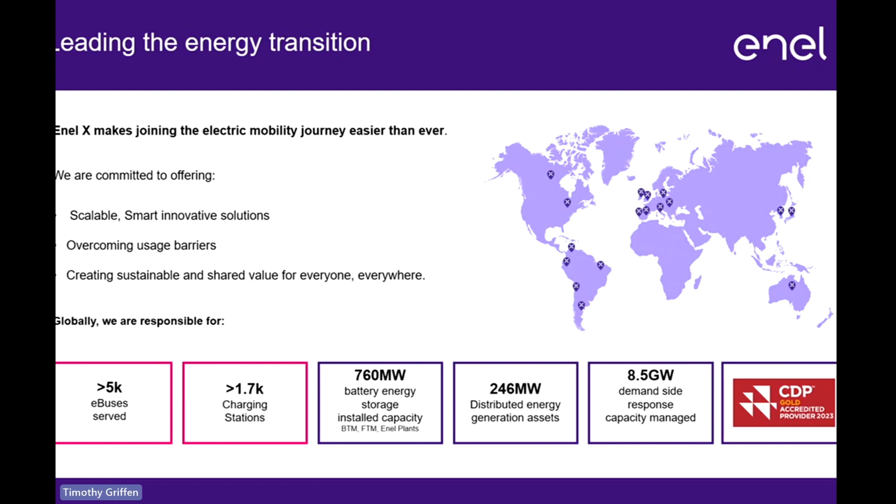As you can see from the slide there, the numbers speak for themselves. We serve over 5,000 e-buses internationally, pushing on to 2,000 chargers installed, and also on the battery energy storage, distributed energy, and the demand response capacity that we manage, almost 8.5 gigawatts.

So this is what I would say is a very dynamic energy landscape. And part of that is obviously the trilemma. We're at a transition point for the industry, industrial revolution of energy 4.0, I believe. And collectively, we're all moving towards a more sustainable, more environmentally friendly way of working. Every business is different in that they have a different mix of whether they need secure, affordable or green energy.

Tim alluded to before that the public transport sector's journey to net zero is moving quite quickly. TfL want to be carbon neutral by 2030. We want to have a zero emission fleet by 2034. That's approximately another 8,000 vehicles between now and then. First Bus, Stagecoach, similarly zero emissions fleets by 2035. Most of the large operators are on a similar kind of pathway to doing that.

Previously, I think the only real issue with energy was the sustainability side of things. Obviously, with recent events, energy price volatility driven by Ukraine and grid instability now means that it's a very volatile area that we're in at the minute. It's obvious that you need a partner that can get you secure energy for your business continuity, obviously a sustainable solution as well. And it's got to be affordable for you to make that business case for your own personal businesses.

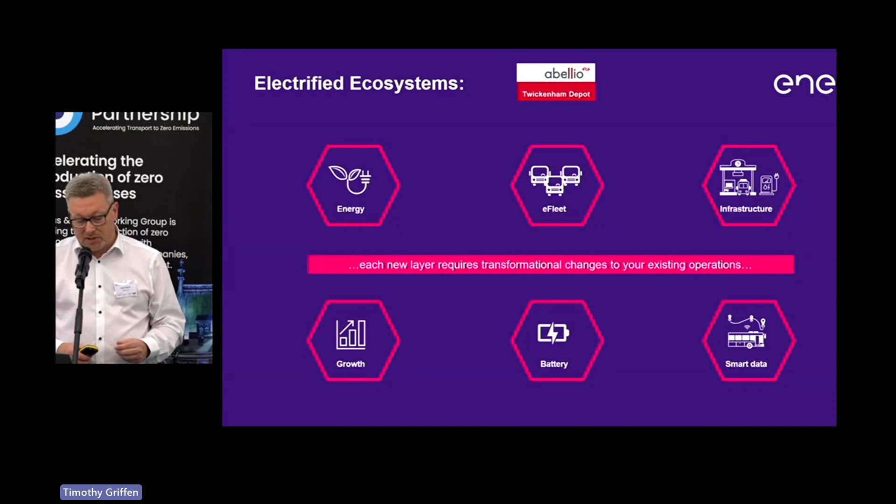Each depot is different. As you can see there, we put on the screen six key areas that you need to consider. You've got your energy, your fleet, your infrastructure, you've got future proofing for your growth, your battery, and your smart data, getting extra data points that bring you efficiencies from your assets and your operations.

But with all these key separate areas, it brings with them all areas of different complexities. We just highlighted some of these on the screen, and I'm not going to go through all of these, but it's just highlighting some of the areas you need to consider when you're electrifying your depots.

If we look at energy as the first one, as battery electric vehicles overtake your internal combustion engines, the cost you're spending on fuel against energy will counterbalance, and so you might want to look at green power purchase agreements.

The challenge of getting a grid connection is absolutely huge and critical for most businesses. Are there other developments in the area? What are your neighbours doing that could affect the grid connection? Getting energy market access to monetize your assets, and utility bill management is another area you might want to consider, where you can collectively look at all your sites and actually make adjustments to the way you're using energy. The greenest kilowatt of energy is the one that you don't use, essentially.

So that's one of the key areas of the complexity. There's a huge amount of detail within each of those. Within the presentations that Craig and Peter are going to give, consciously or not, they're all going to talk about different areas of this kind of ecosystem.

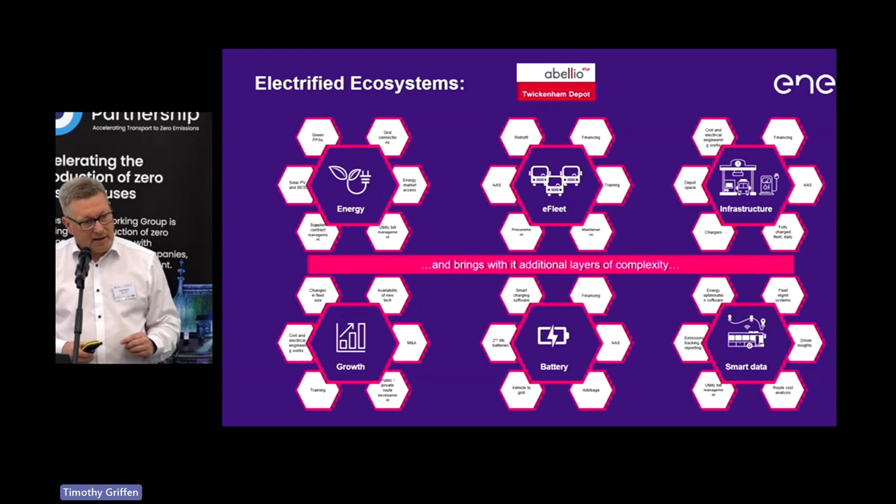None of us can work in silo or independently. It needs everybody to collectively come together to provide a solution, and you need an interconnected ecosystem there. So it's designed around your specific needs, and each specific element needs to come together, and you need somebody that can pull all this together for you.

That's the crucial role that Enel X plays in this electrified ecosystem, bringing all the partners together to make sure the client's got the solution that's fit for their needs. So I'd like to introduce Peter to talk about the role of the IDNO and his background, and also a bit of insight into why we're here today, which is the Twickenham depot.

Good afternoon, everybody. They said warm the crowd up, so I've come to do that. Let me first see if I can operate this.

So what we're talking about today is all these systems effectively need a grid connection. They won't work without that grid connection. The network is rather constrained to get that connection. So what does ESP do as far as that's concerned?

ESP are an IDNO, and for those who don't know what an IDNO is, it's an independent distribution network operator. The difference between us and DNOs such as UKPN, who's in this area, is that we can own and operate networks throughout the UK, and we do that with the same regulation as the DNO. We're licensed by Ofgem, and we have the same regulatory compliance criteria to meet as UKPN do. So we do the bit in between, effectively the DNO and the end user — that's the bit of our network.

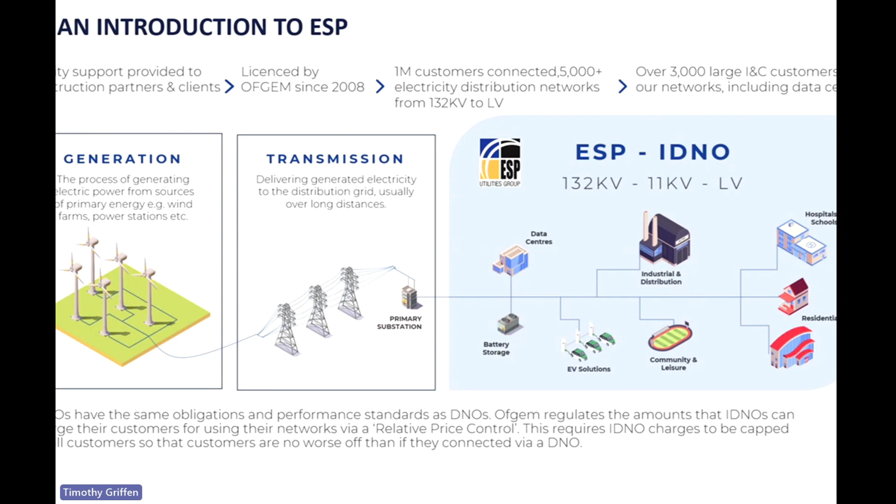Moving on to challenges and capabilities. In terms of the challenges, there are a number of challenges to get a connection from the grid, based on the capacity available at the grid. We apply for what's called a point of connection to the grid, and that in itself has its own challenges, because although you might ask for a typical bus depot site of 4 or 5 MVA, the load might not have that capability in it. So it may need reinforcement activity on the DNO's network, and that could take substantial time.

Equally, there are other users that want that network capability who are also in the vicinity of most of the bus operators trying to capture that network capability. So there is a challenge in getting a point of connection to the DNO. At the end of the day, the management of that point of connection is really important to the end user. Why? Because if you don't accept that point of connection and you don't pay for it, it's likely to go to others, and the network is really constrained out there. So we've got real issues in terms of the point of connection activity.

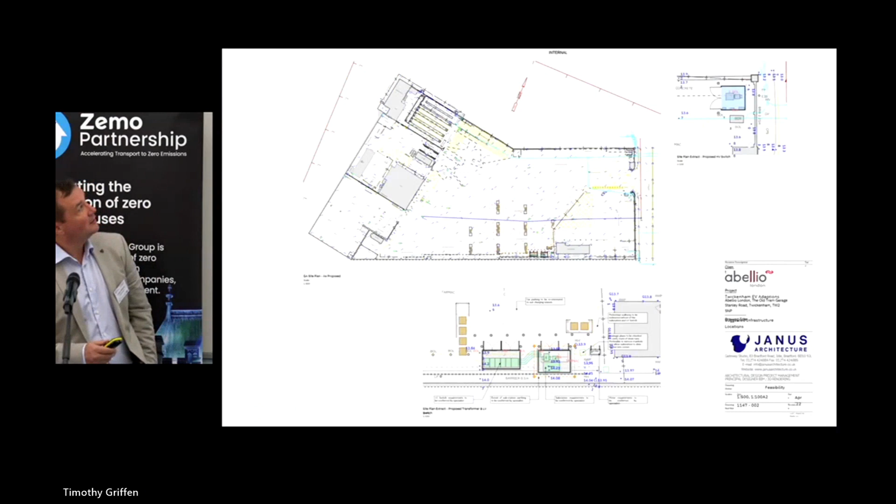So over the next few weeks and months, we had a lot of ideas banded around about locations and things. Loads of drawings came out, lots of meetings about how to site stuff. These aren't my drawings, they're Janus Architecture's. A lot of work went into these, figuring out how to do 100% of the site.

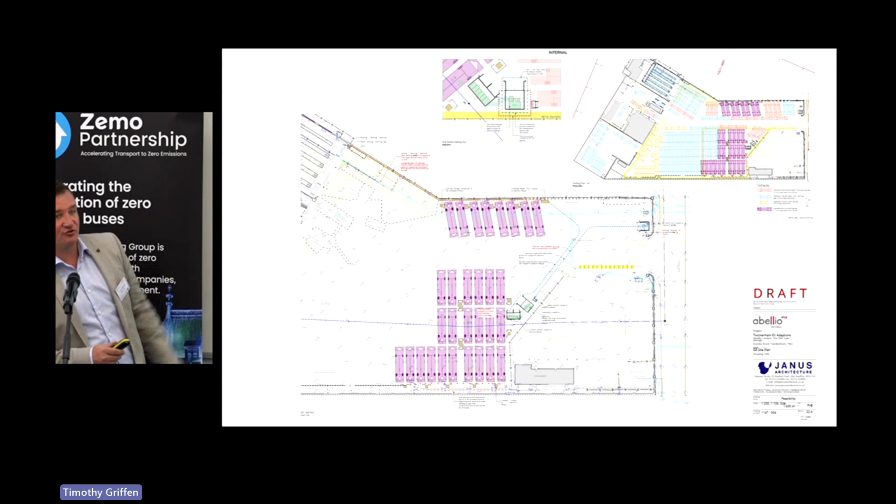And the final layout was this one - you'll see the site when you get there, but this is showing phase 1. I think it's 30 buses, 16 chargers, with one spare. It's got the substation and the LV panel board, which you'll see when you go to site later this afternoon. But we have to take into account phases 2, 3, 4, however many, if they ever happen - which they will do.

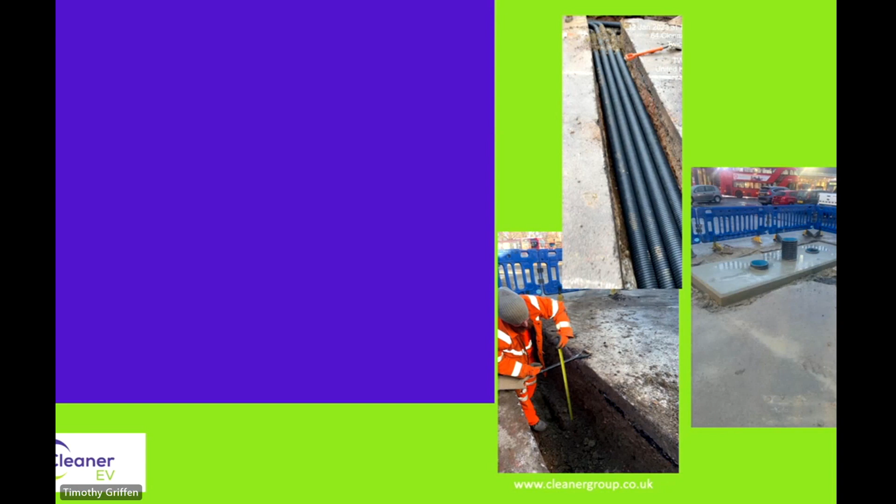Now we have the locations of the buses, the chargers, the switchgear, the substation, we need to work back from each charger. How much power each charger needs affects the size of cables, and for each charger there's the civils, the GRP, and the switchgear.

As I stated before, we really want to deliver the best project for our client with the budget we've agreed on. So it's really important that the client gets - I won't say free, but at no extra cost to himself - as much value for the money as possible. So on this project, it's not free, but it's working within the budgets we've got.

We upgraded the main panel board, which you'll see, from 2,500 amp to 3,200 amp. It was quite obvious to me that what was specified wasn't big enough for future use, so we upgraded it.

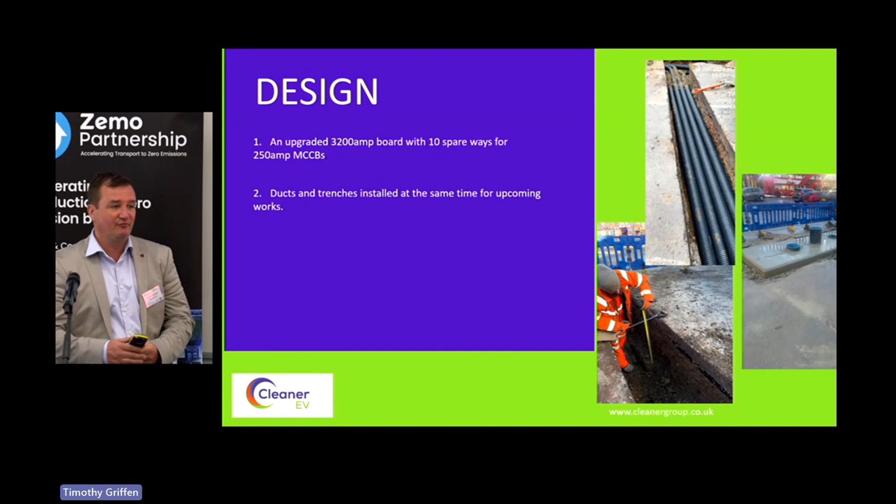Ducts and trenches were installed at the same time for upcoming works. We've actually ripped this car park up, and we've got big plant on site. It's easier for us to dig a wider trench and put more ducts in now for future use of chargers than it is to come back and do it after. So we just did it - no problem at all.

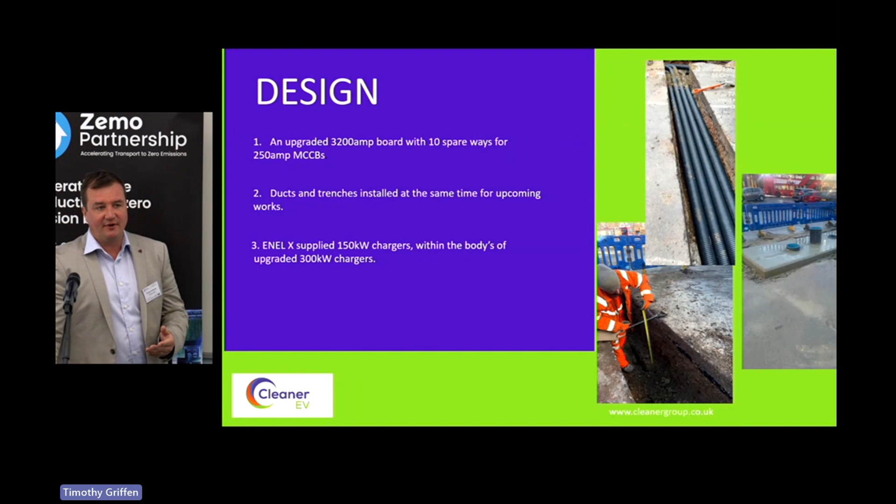ENEL X supplied 150 kilowatt chargers, which was what we needed, but they supplied them in the body of a 300 kilowatt charger. With this, the client in years to come can add rectifiers to the chargers - we'll open one up for you today. They're actually only half full, and they can have probably 200 kilowatts of charging from these chargers, with no real major costs or upgrades if they ever need it.

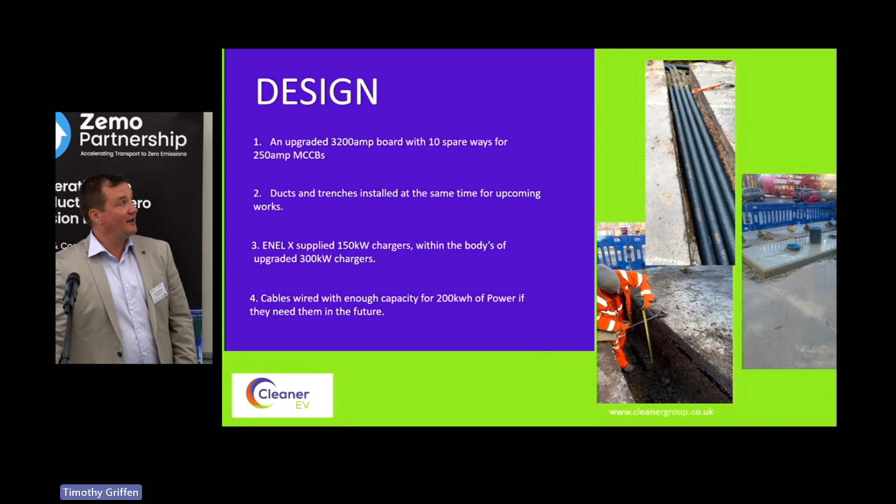This is a funny one for me - cables wired with enough capacity for 200 kilowatts of power if they ever need it. That sounds great, doesn't it? Actually, it was a mistake, because when we ordered the cables for the chargers, all the cables we wanted were out of stock. So we just took it on the chin and ordered bigger cables, pulled them in, and it's all there ready to go, if it's ever needed, that is.

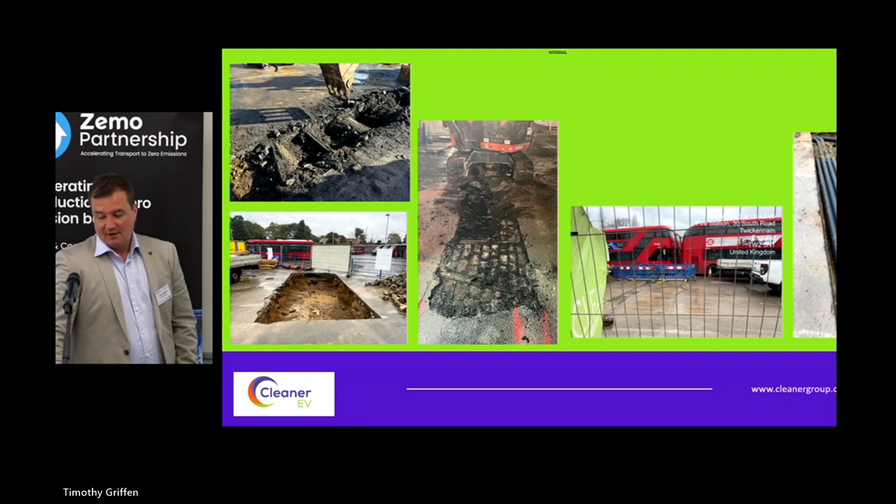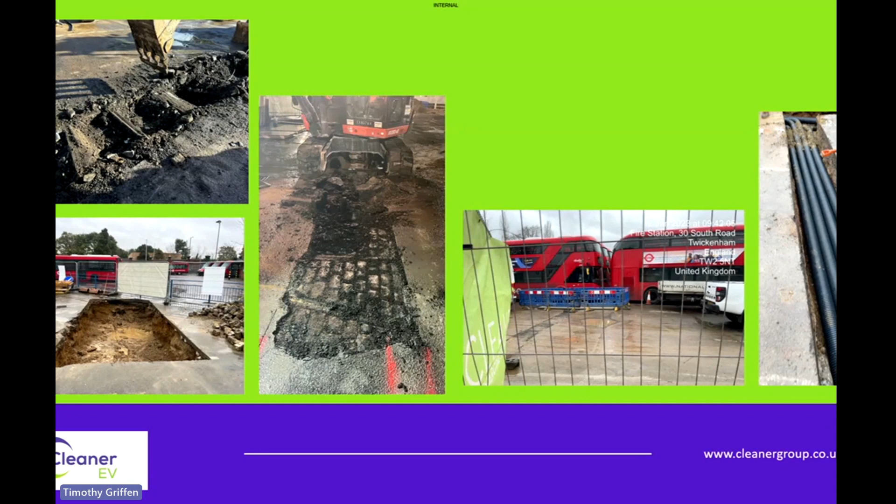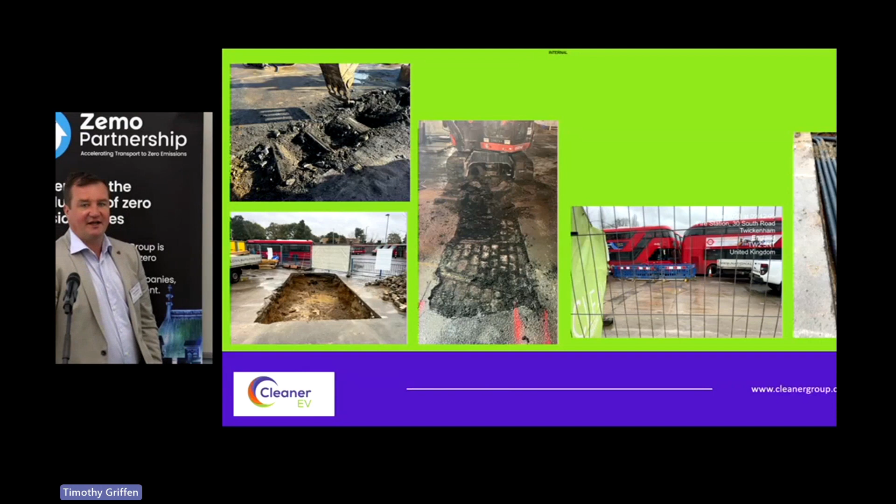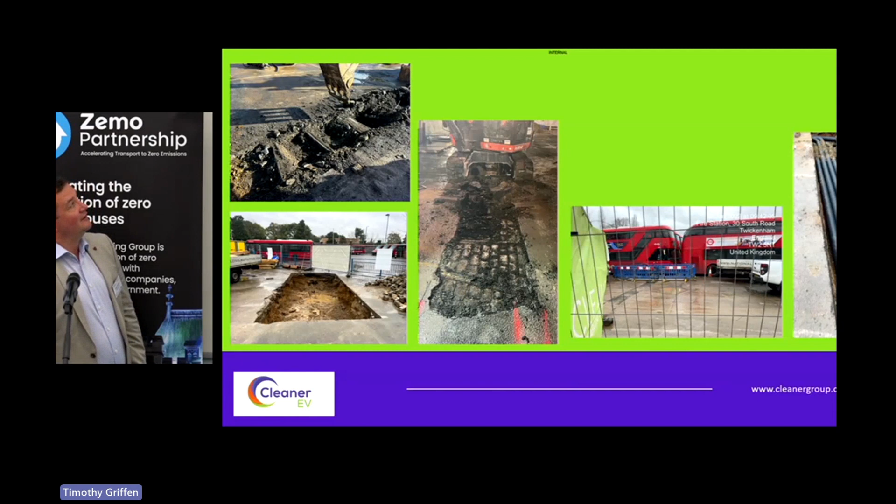So you see a photo there, it looks like a swimming pool, and this is actually the site of the GRP housing. I think I had sleepless nights for this, because when we dug that out, we could have found anything underneath there. As you'll see on site, there's nowhere else for the switchgear to go. We could have found a Roman fort, we could have found LV cables, HV cables, drains, anything. And when we pulled that back, I think we all just went to the pub celebrating because we knew the job could happen. That hole was so important to us.

Wait, I'm missing a few slides. Here we go.

Keeping the site constantly tidy and compact - mentioned this every night, the site went back to a small compound, every morning it went back out. It's just keeping the site flowing for the client.

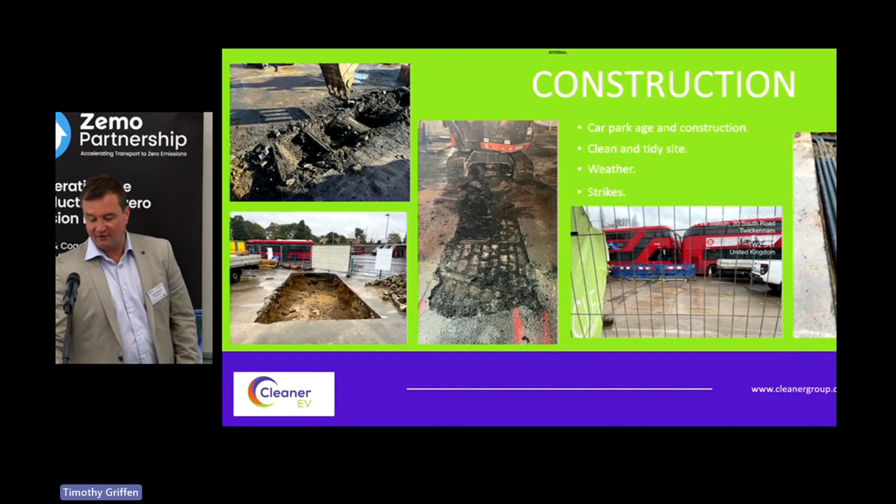At Cleaner EV, we pride ourselves in a few simple things. In the sales pitch, I'd like to say we approach things differently than others, which is things delivered on time - touch wood, everything's delivered on time. If they aren't, we'll bend over backwards till they are. We're not a big company, we're not like an NLX or like that - we're only a small company, but these projects mean a lot to us. I put extremely, because I think they are - we do everything to a really extreme high standard. We are proud of these projects.

As much less stress on the client as possible. These guys run buses - they don't have the time or energy to battle with contractors on site. So let's make it as easy as possible for them.

And the last one, which makes the finance people happy: as a company, we don't do variations unless the client asks for something additional. If we've shown you the actual structure of the car park, some companies have gone back saying it's a tough one, 200-year-old granite sets, let's put some more money in for it. We don't do anything like that. How many specialist principal contractors can you say that about?

It all accumulates, in my opinion, to a project we can all be proud of, from everyone who worked on it. But more importantly, and this is important to me personally, a happy client - which is everybody's goal in business. We've got a cheesy emoji at the end of it.

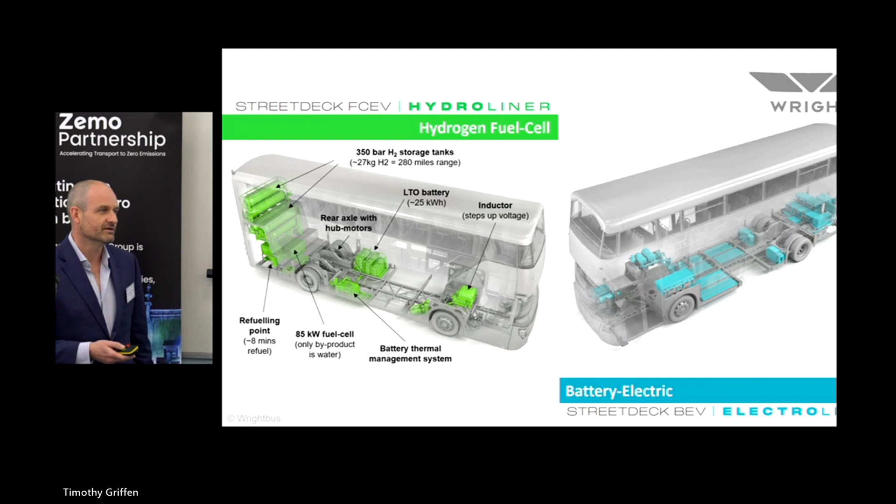There are fluctuations within the battery managed, so you get about a 20-mile range on battery effectively. So if you run out of hydrogen, you can still get home with it. You can drive it on and off, empty it, and it will operate as a battery.

Our electric bus, the Electroliner, was designed by the engineers within Wrights during the pandemic, and it was very much designed as an electric bus. It's not a compromise of a body on a chassis - it is absolutely 100% an electric bus, and because of that, it is highly efficient.

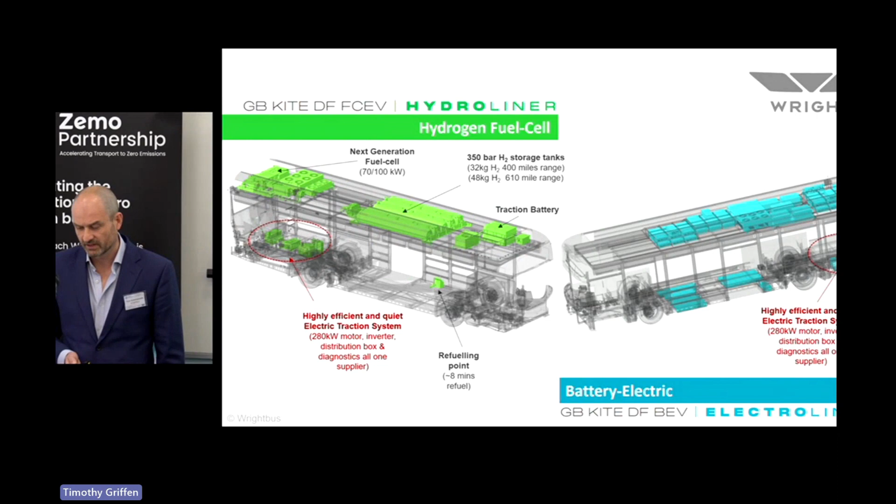There's a lot of commonality across both products, same on the single decks - commonality where we can get it. The great thing about the single deck when it comes to the hydrogen bus is you have far more room on the roof to put tanks in. The limitation of the double deck is you can only stack them up the back. So you get an outrageous range on a single hydrogen bus, up to 1,000 kilometers. And again, you've got far more room on the electric bus, up to 300 miles by adding more battery packs, because you have the space for it.

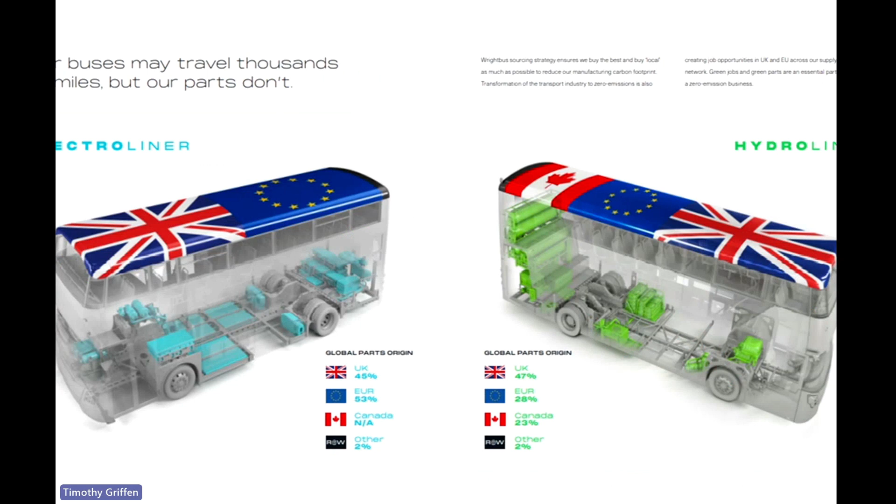We are very proud of the fact that we source as locally as we can. We're very happy that we're sourcing our products as locally as we can - UK and Europe for the Electroliner, the component parts: Voith, ZF, Siemens. The Canadian flag that's on the hydrogen bus is the Ballard fuel cell that's in the back of it.

Wrights have always prided themselves in this - I think this is really important. It comes down to the decision-making process when you're looking at going zero emission - where do we go? Is it electric, is it hydrogen? Simply by the route analysis tool that we've had running for almost 30 years, which takes into consideration Google Maps, topography, stops, weather, wind, loading, you can get to a point where you can look at the battery packs or the range of a bus. It's a very binary tool that's been set up with a lot of people smarter than me, and effectively it gives you an answer.

They're giving up 10% either way - they're not wrong. So we approach a client when they say, right, we want to look at zero emissions, and the tool will effectively develop exactly what the client needs. It's taking it away from a decision of saying, well, we think this bus is best, when actually this is how it works out. It's better, and we back it up with a telematics tool - we monitor the performance of everything, so we understand that our models are correct.

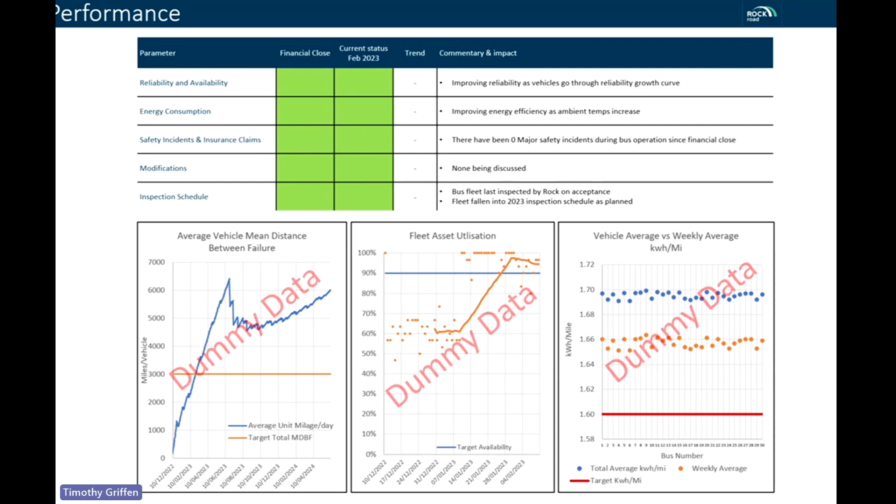This slide is just a flavour of some of the active asset management that we do. This was a report using some dummy data, looking at bus performance. We look at both contractual data, things like warranties as part of the MSA, and we monitor that on behalf of Abellio and with them. But we also look at bigger trends, reliability over time, macro trends - what the markets are doing, what interest rates are doing, what metal prices are doing - to look holistically at how the project is moving, where it could go, and whether there are any risks to the three key risks we looked at.

This is the tool that we have, it's called Rockstar, our in-house tool. This was just one of a flavour of slides we look at in terms of bus performance. It's not specific to bus, it covers battery, macro trends, the whole remit.

I think, Tim, that was it. Thank you, guys.

Thank you. Great stuff, Jake, thank you very much. Certainly an area that is going to be growing in the bus sector going forward. Really interesting stuff, thank you.